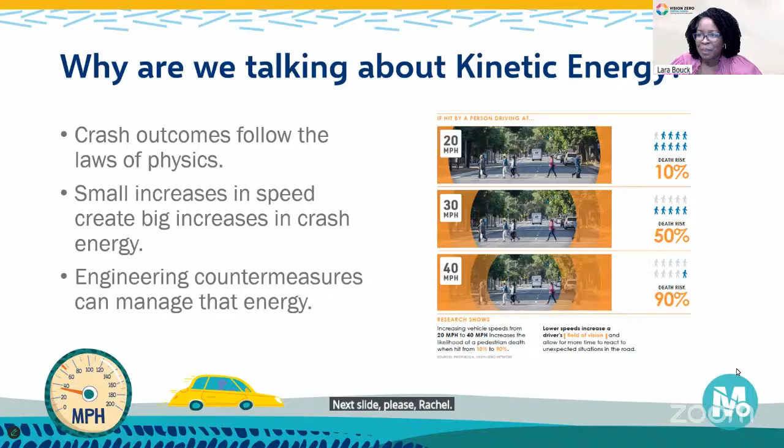So our panel today is going to walk us through the science behind kinetic energy, what it is, how it scales, and why small changes in speed can mean the difference between a minor injury and a life-altering one. Then we'll turn to the engineering perspective, how we can use our design tools from traffic calming to protective infrastructure to control energy in the real world. And finally, we'll look at a case study that brings these ideas together, showing how applying these principles can transform safety outcomes in our community.

By the end of this session, we're hoping that you'll see kinetic energy not as an abstract physics concept, but as a practical lens for understanding and preventing serious and fatal traffic crashes. It's a way of thinking that helps us design systems where human mistakes don't have to lead to tragedy.

So to guide us through this conversation today, we are joined by Dr. Wes Kumfer, a senior engineering research associate at the UNC Highway Safety Research Center. His work includes crash data analysis, the safe systems approach, and workforce development, and he has led a wide range of safety research projects for both FHWA and NHTSA. Dr. Kumfer is also a key instructor for the Road Safety Academy and the Traffic Engineering Accident Analysis System.

We're also very pleased to welcome Luana Brashears, a professional engineer with 15 years of experience across the public, private, and academic sectors. Luana currently serves as ITE's Planning and Safety Senior Director, where she leads research, technical initiatives, and project management in support of federal and international transportation safety efforts. Her background includes extensive work in safety operations, multimodal planning, and development review.

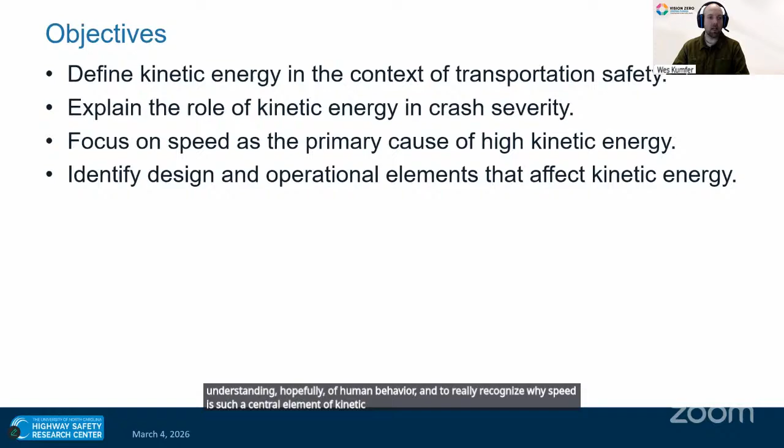I'm also going to give you a little bit of psychology and a better understanding of human behavior, to really recognize why speed is such a central element of kinetic energy and why it can be difficult to address. So in that vein, I want to start out with a little thought experiment.

I would welcome you to put responses to this into the chat pod. I want you to think of a roadway near you, and answer three questions in relation to that roadway. You can pick any roadway near you. Think about what the speed limit is, and whether that roadway intuitively leads drivers to that speed limit, and why or why not. I'll give you a minute or two to think about this and see some answers pop up in the chat pod, and then I'll move on to an example that is very close to my house.

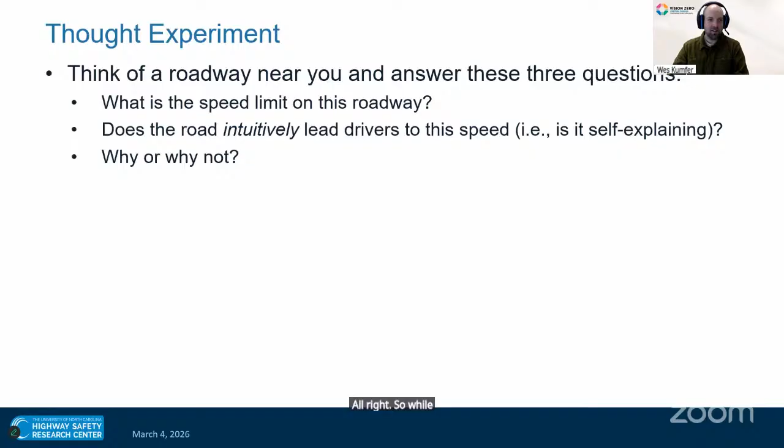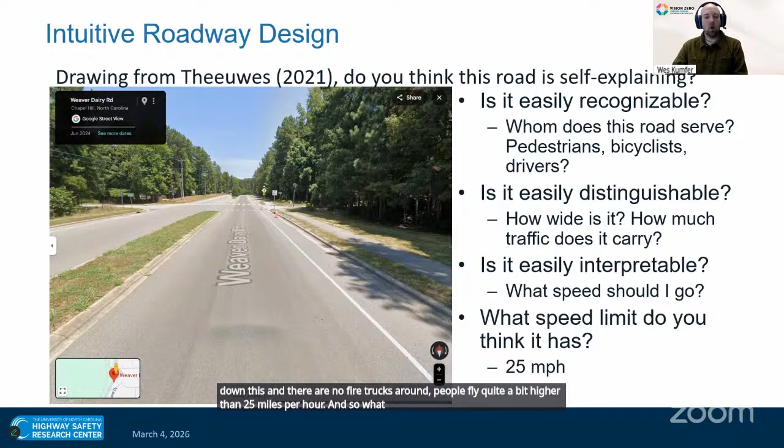One of the central themes I'm hoping to draw out is that we really need to try to manage speed by designing intuitive roadways so that we can address kinetic energy. All these concepts are related. Our inability to prevent death and serious injuries on roadways is in many ways related to the way that we design roadways and expect drivers to interact with them. It makes it important for us to consider how we are designing intuitive use of a roadway.

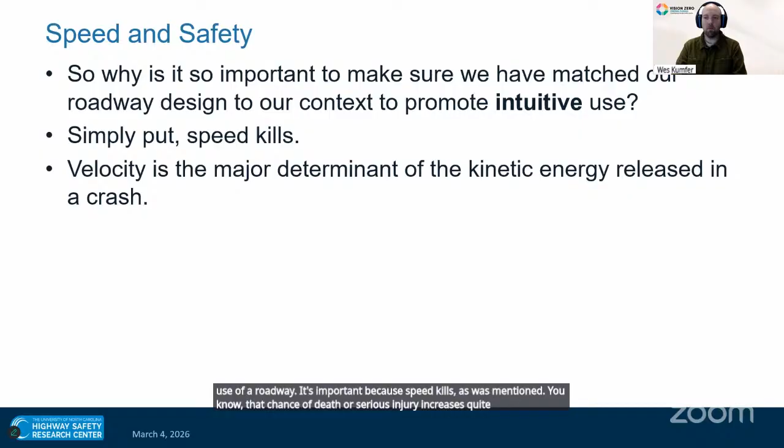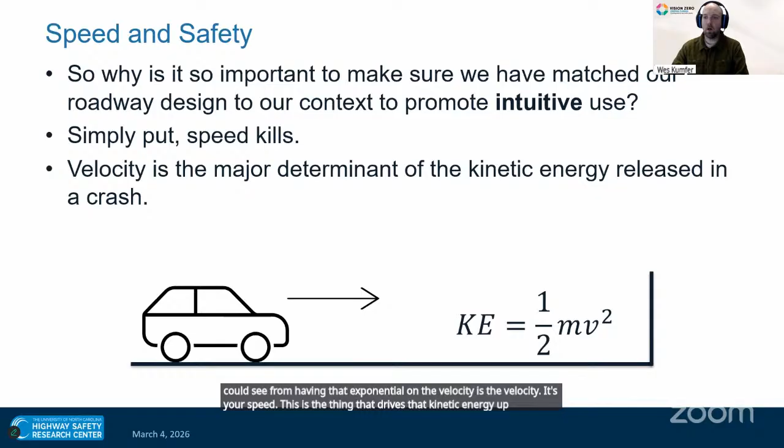It's important because speed kills. As was mentioned, the chance of death or serious injury increases quite a bit as your speed increases, and it really just comes down to physics. Kinetic energy is 1/2 times your mass times your velocity squared. So the most important factor, as you could see from that exponential on the velocity, is the velocity — your speed. This is what drives that kinetic energy up, and it is what makes it so hard to prevent death and serious injury on our roadways.

I see one comment that my example assumes no speed limits. Yeah, definitely not very good signage either. There are some speed limit signs, but at least on that stretch I showed you, there weren't.

So I'm going to present some statistics now to illustrate the reality of why this is so important and what it is, or what I mean, when I say that speed kills.

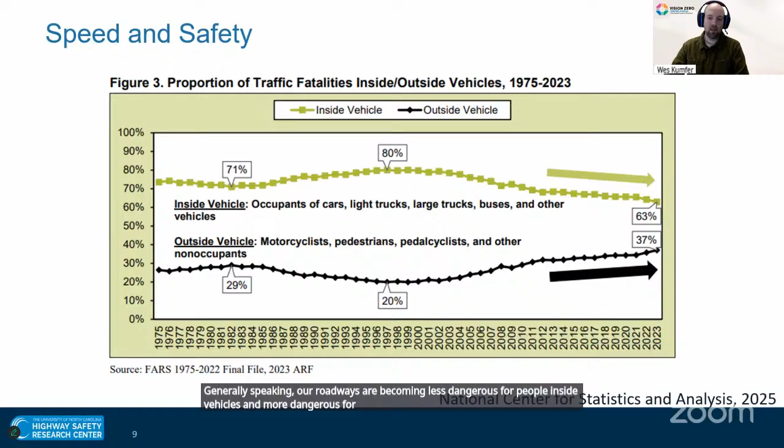However, we've seen an opposite trend where for people outside vehicles — pedestrians, bicyclists, motorcyclists as well — that fatality trend has been consistently going upward. There have been some slight changes here and there, especially with pedestrian safety, but generally speaking, our roadways are becoming less dangerous for people inside vehicles and more dangerous for people outside vehicles. That matters when we think about who is protected and shielded from kinetic energy.

But when we look at what affects kinetic energy and how it can impact different people involved in crashes — I mentioned earlier that the fatality trend for vehicle occupants has been going down over time, and part of that is the fact that we have much safer vehicles, generally speaking. You can now survive a collision within a vehicle that has better crumple zones, better seat belts, better airbags. And we do have a better sense of how kinetic energy is transferred between vehicles when a crash occurs.

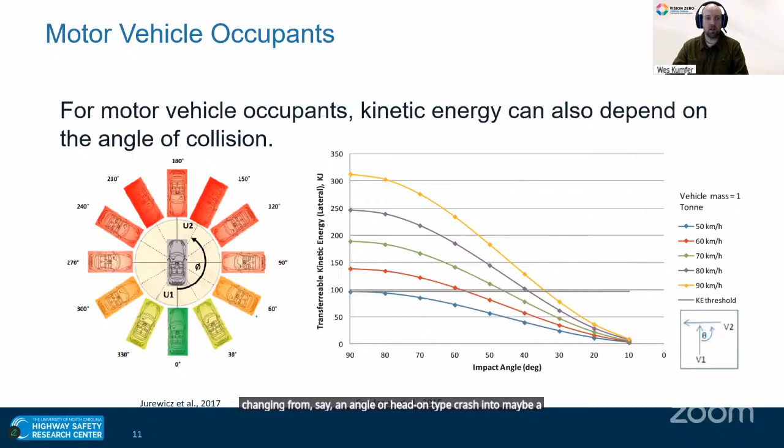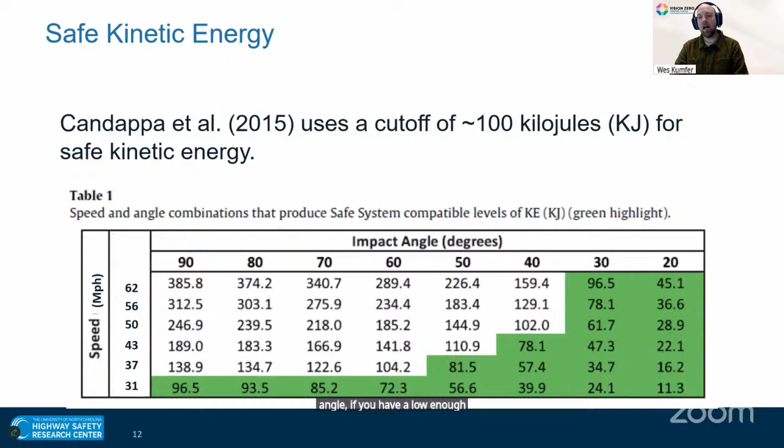However, when we consider the differences between who is involved in those fatal crashes — people outside the vehicle versus inside the vehicle — we see that even these safe spots, where you can survive a crash at pretty much any angle if you have a low enough speed, do not necessarily apply to people outside of vehicles. There's been a fair bit of research showing that this follows something of a power curve.

Most statistics say 18 miles per hour is where you get about a 10% chance of fatality or serious injury. 20 miles per hour would be how you'd standardize that with designs, but 18 miles per hour is about where that 10% fatality injury risk sits. As you increase your speeds, you increase your chance of death or serious injury quite a bit.

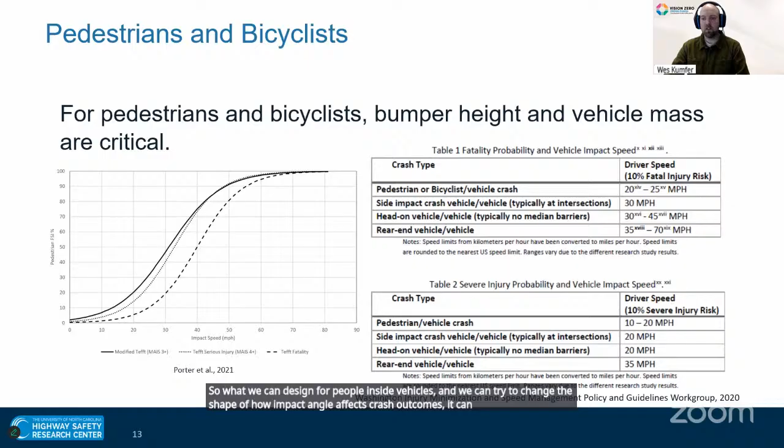So while we can design for people inside vehicles and try to change the shape of how impact angle affects crash outcomes, it can be hard to do with pedestrians and bicyclists, and it remains something of a pernicious problem within traffic safety. Another thing worth considering when designing our roadways and thinking about who uses them and whether they're intuitive for different road users is the fact that our motor vehicles have gotten quite a bit larger in the United States over time.

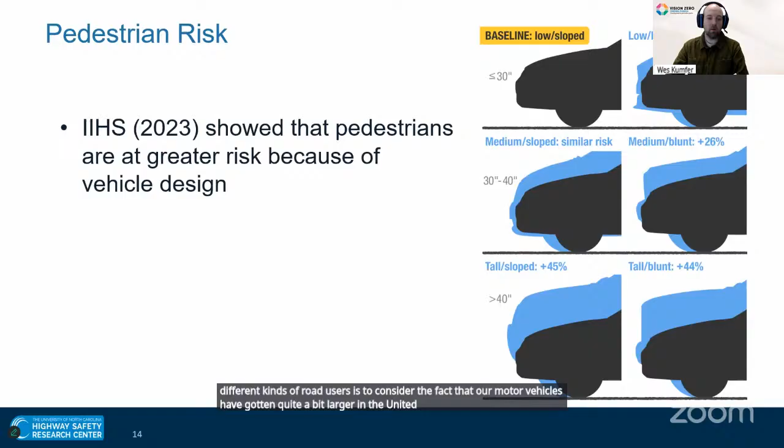Research done by IIHS showed that pedestrians are at greater risk because of vehicle design. Over the past 30 years, our giant SUVs are now 4 inches wider, 10 inches longer, 8 inches taller, and about 1,000 pounds heavier than they used to be. So while that V squared is the most important part of that kinetic energy equation, when your M value goes up, we know it can change those severity outcomes as well.

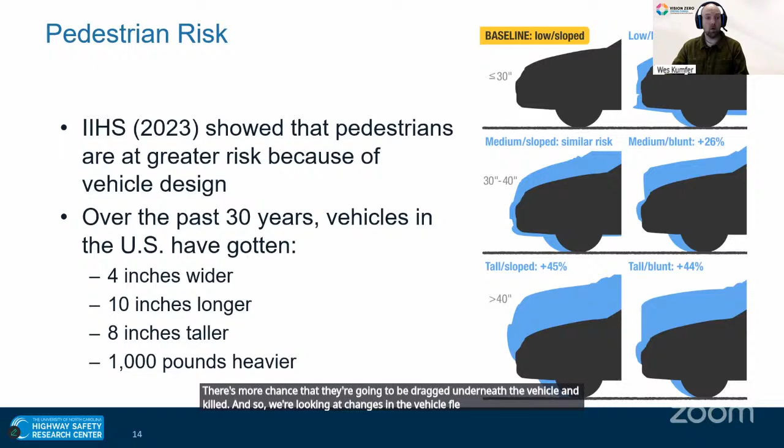The reason bumper height is important is because it changes the way injuries affect pedestrians and bicyclists. In the past, if someone was struck by a car, maybe they would roll up onto the hood and there would be a greater chance of survival. However, if you have a large SUV striking someone square in the chest, there's more chance they're going to be dragged underneath the vehicle and killed. So we're looking at changes in the vehicle fleet and greater risk to pedestrians and bicyclists over time.

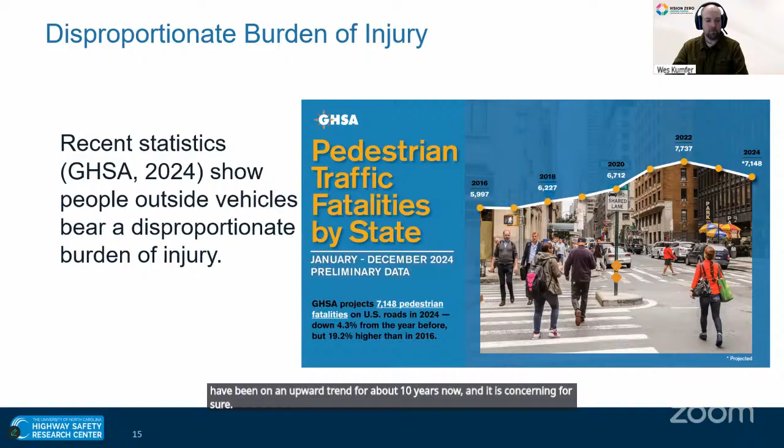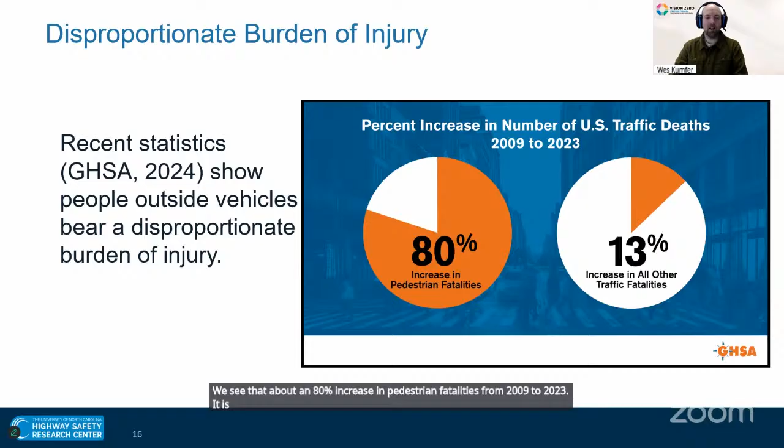You can see this in the statistics, as I mentioned, with pedestrians—there is just a disproportionate burden of injury. As I mentioned, that pedestrian fatality trend did change a little bit within the last couple of years. We've seen a little bit of improvement, but generally speaking we've been on an upward trend for about 10 years now, and it is concerning for sure. We see about an 80% increase in pedestrian fatalities from 2009 to 2023. Who is being killed on our roadways is disproportionate.

It's also worth considering, when we're talking about speed management and why it's so important, some of the other human factors involved as well. We know that stopping sight distance increases the faster you're going, meaning it's much harder to react. But we also know, just from a human factors perspective, that people's vision somewhat narrows and becomes tunneled as they go faster, making it much harder to react to, say, those pedestrians or bicyclists crossing in front of you.

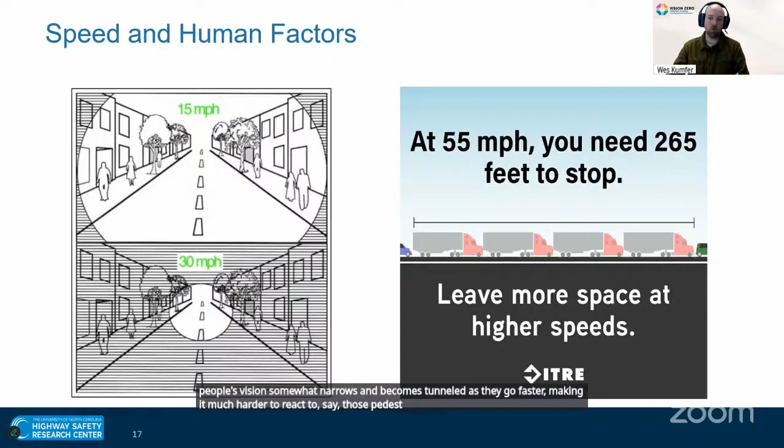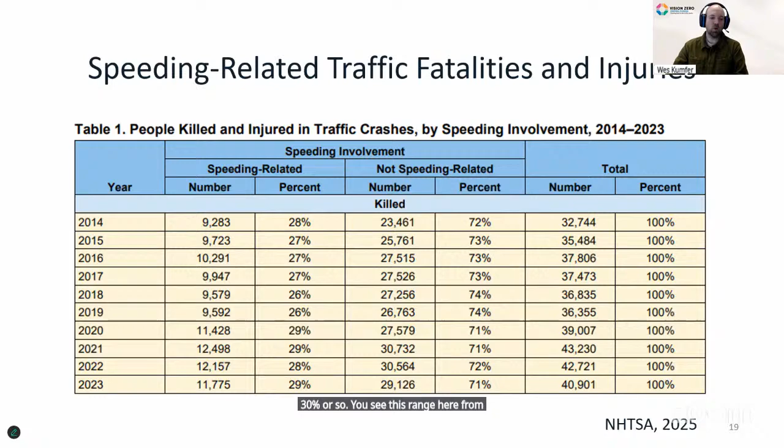I do always like to add this caveat of whether we should be concerned about speed or speeding. While most of the NHTSA-related statistics you're going to see are related to speeding—because saying 'speed' in a crash data form is much harder to measure—we do know that speeding involvement for crashes hovers at about 30% or so. You see this range here from 26% to 29%. Generally speaking, in the US, it has hovered at about 30% per year, and that has been consistent for a very long time.

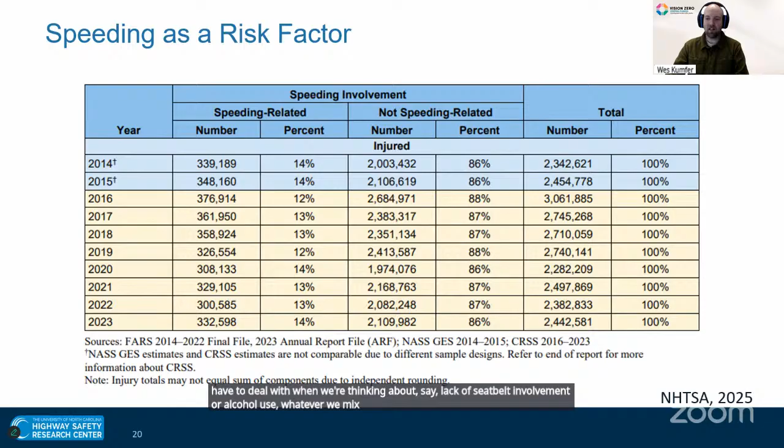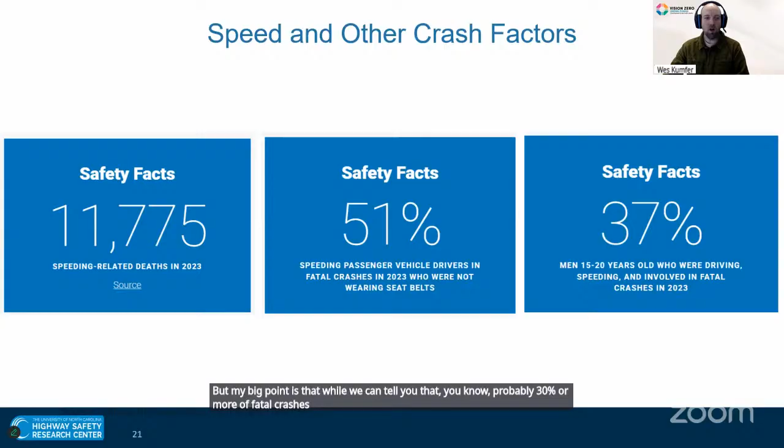Speeding involvement tends to confound some of these other issues we have to deal with, like lack of seatbelt use or alcohol involvement. Whatever we mix speeding as a risk factor in, it can become more dangerous. Speeding is one of the things we often focus on because it's what we have in our crash forms, it's what we know how to address, and it's what our speed limits are designed for, helping us with enforcement. But my big point is that while probably 30% or more of fatal crashes involve speeding, we also know that in many ways we design our roadways to convey unsafe speeds.

We also know that demographics change, and as people are younger or older, they become more susceptible to kinetic energy as well. All of this will lead me to give you a brief taste of how we manage kinetic energy before I pass it off to Luana. We need to consider how roads intuitively guide drivers to an appropriate speed, as I mentioned at the very beginning when we were talking about that 25-mile-per-hour roadway near me.

That was not an intuitively designed road. It probably wasn't designed to lead people to drive 25 miles per hour. When you have road users of very different mass—SUVs, pedestrians, bicyclists—coming into conflict, then you're going to have unsafe outcomes.

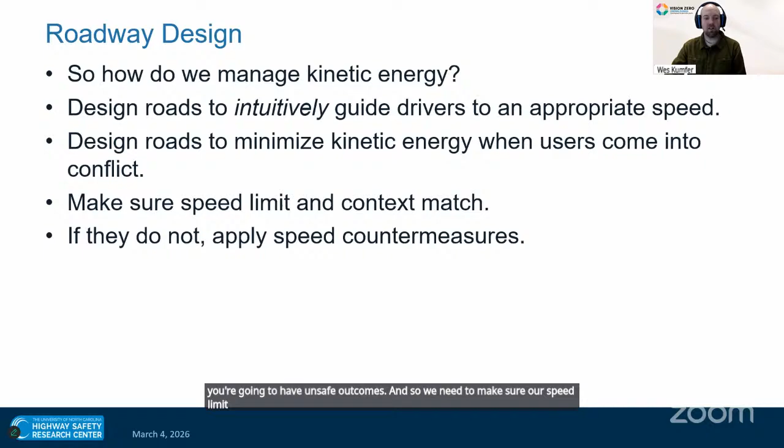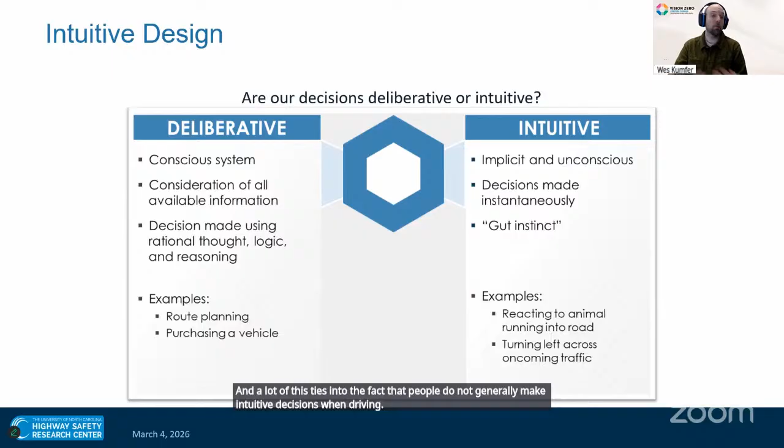So we need to make sure our speed limit and our context match, and if that doesn't work, we need to apply some countermeasures. A lot of this ties into the fact that people do not generally make deliberative decisions when driving. They tend to just follow their gut instincts.

And we know those gut instincts for how we drive are driven by the information we receive around us, driven by the environment. So we can try to change people's behavior by providing information, or we can try to change that environment and guide people without having to deliberately get them to make that decision. That's again why things like roundabouts are so important.

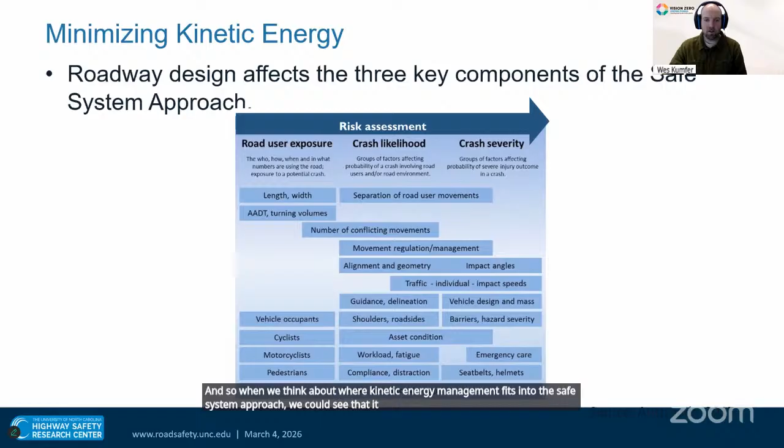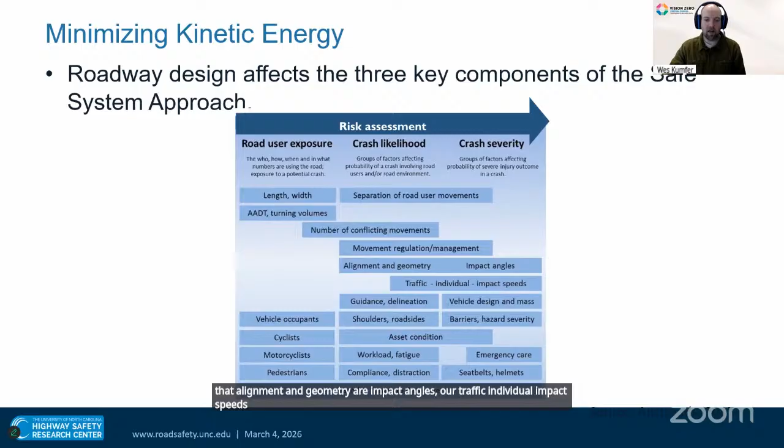When we think about where kinetic energy management fits into the safe system approach, we see that speed affects both your crash likelihood and your crash severity. So there's quite a bit to take into account when designing our roadways within a safe system approach—alignment and geometry, impact angles, individual impact speeds, vehicle design and mass. All of these things are worth considering from a safety perspective.

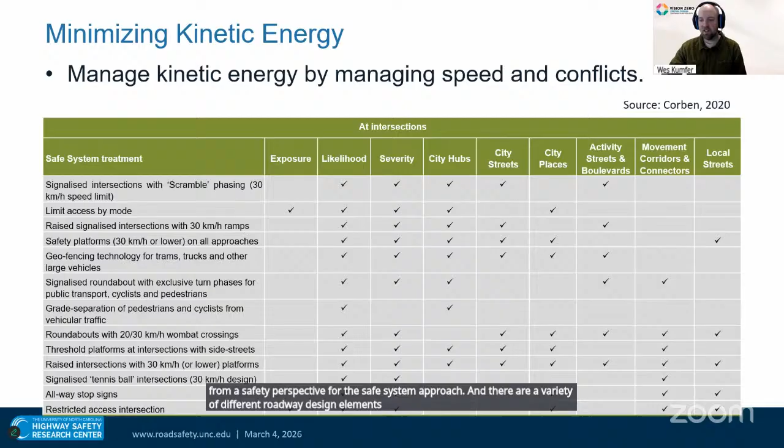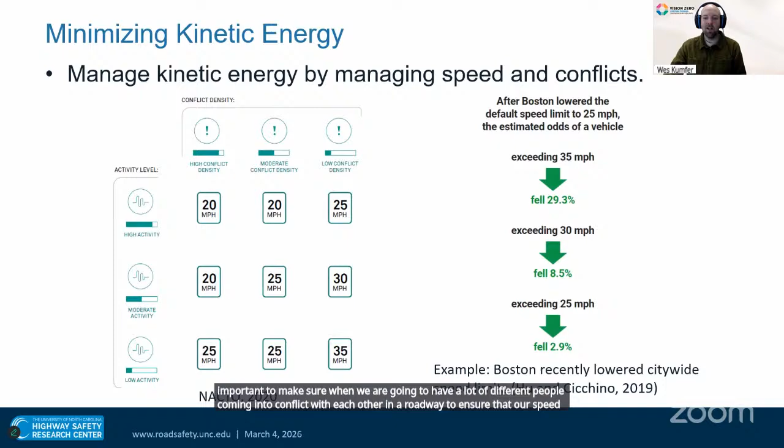There are a variety of different roadway design elements that could fit into these. In the interest of time, I'm not going to cover this too much—I'll let Luana share more from her perspective. But we do know it's critically important, when we have different people coming into conflict on a roadway, to ensure our speed limits are low, and we often find great benefit from reducing those speed limits.

One way we can also reduce those intuitive speeds is to improve visual friction—roadway elements that mentally restrict people as they're driving, like street trees, trash cans, flex posts, narrow lanes. These can all cause people to slow down. We could also rely on vertical and horizontal deflection, like speed bumps and curves.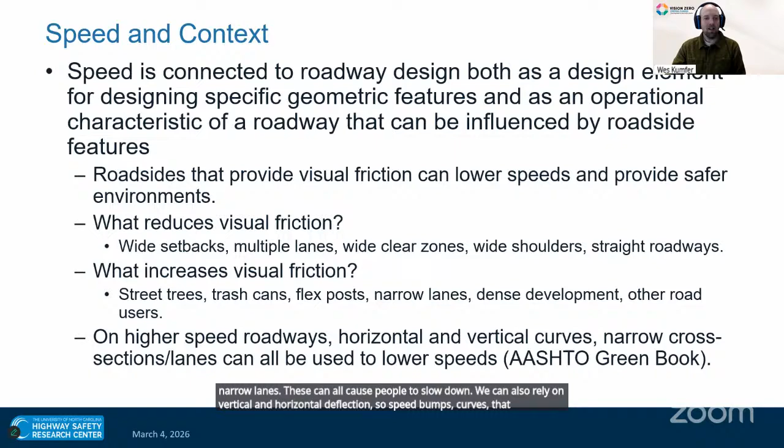We can also think about where within our roadway system we are—rural, urban, or suburban roads—there are a variety of techniques that can be used to slow people down. I really like how the FDOT design manual addresses this by providing a whole menu of options: if you're in an urban center, you should be targeting speeds as an engineer or planner from 25 to 35 miles per hour.

And to get there, here are the things you need on your roadways if you don't initially design for that target speed—things like street trees, short blocks, speed feedback signs, and so forth.

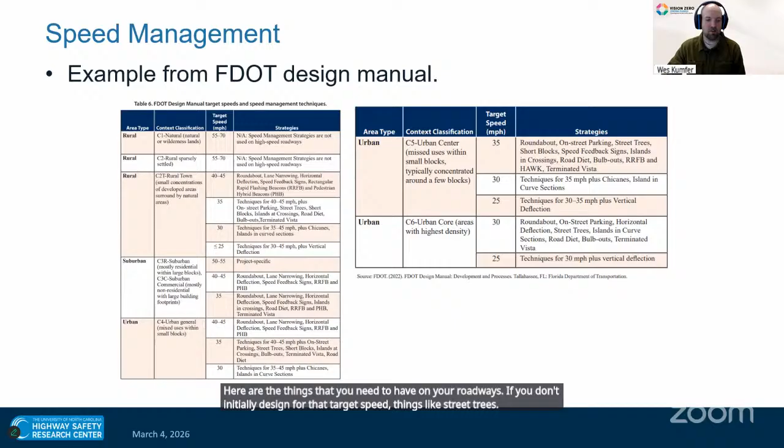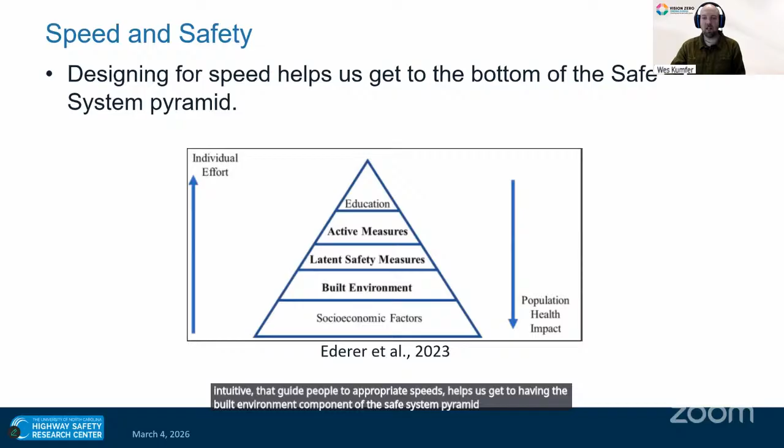Addressing all of this, making sure our roadways are intuitive and guide people to appropriate speeds, helps us get to the built environment component of the safe system pyramid, where we're improving safety for all road users. So in conclusion, kinetic energy does kill.

Speed is the critical element of kinetic energy, and vehicle size does matter. We want to make sure we're keeping those speeds down, especially when different kinds of road users come into conflict. We can design our roadways to be more intuitive, but we can also install speed countermeasures when they aren't—this is all a critical element of the safe system approach.

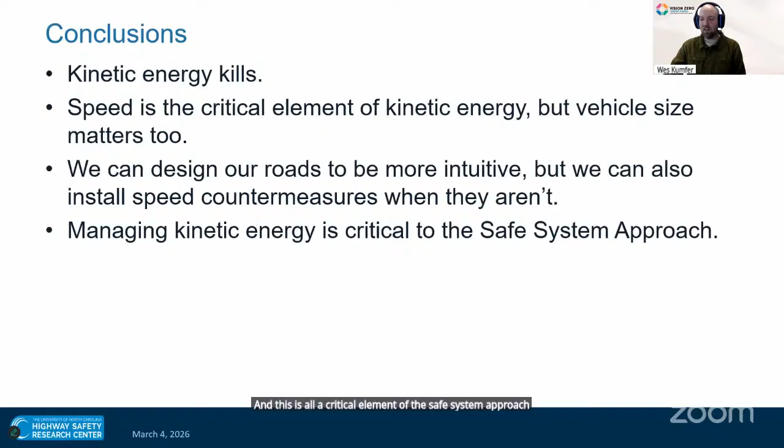Now, what I'm talking about is exactly what Wes just mentioned—how can we think about kinetic energy through the safe system lens? So what I'll do here today is give a framework, some ideas at a higher level of how to implement those strategies to really try to manage kinetic energy in your systems.

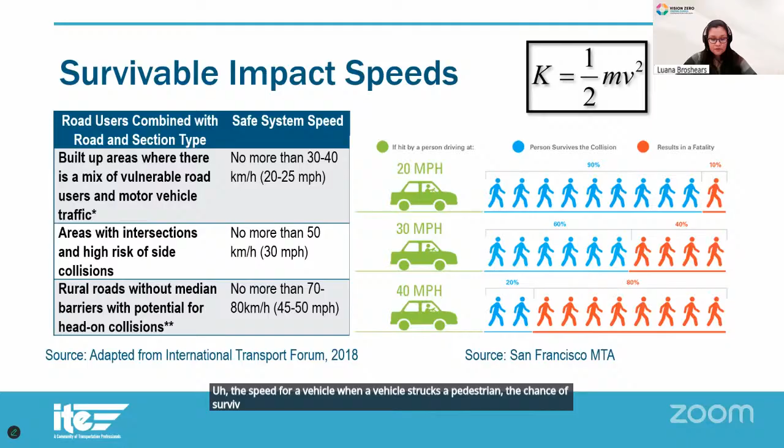Just to give you an idea, when we talk about people outside the car, this graph shows the survivable impact speed for a pedestrian. As you can see, when you increase the speed of a vehicle, when it strikes a pedestrian, the chance of survivability is lower as you increase the speed. Just a few things to keep in mind as we think about these things.

So if we're thinking about kinetic energy, let's talk about the kinetic energy components in our transportation systems - exposure, severity, and likelihood - and how to address those. This is a high-level framework of ideas on how you can start to prioritize strategies to really make a difference and ensure you have no fatalities and serious injuries in your system. Exposure is where and how far people are traveling; severity is speed, mass of the vehicle, and vulnerability in a conflict; and likelihood is where those conflicts occur.

When you think about how to address those, the things I like to group under each component include demand management - how can you decrease reliance on vehicles through supportive land use, again at the base of the pyramid? How can you increase home, employment, and shopping proximity, reduce satellite development, shorten travel distances, and really reduce vehicle miles traveled?

So strategies like these really can help create shorter trips and shift the demand across several modes of transportation. And then for severity, really speed management, as Wes already mentioned before, how can we adjust speed for the context, the land use, self-enforcing roads? And then lastly, likelihood, right?

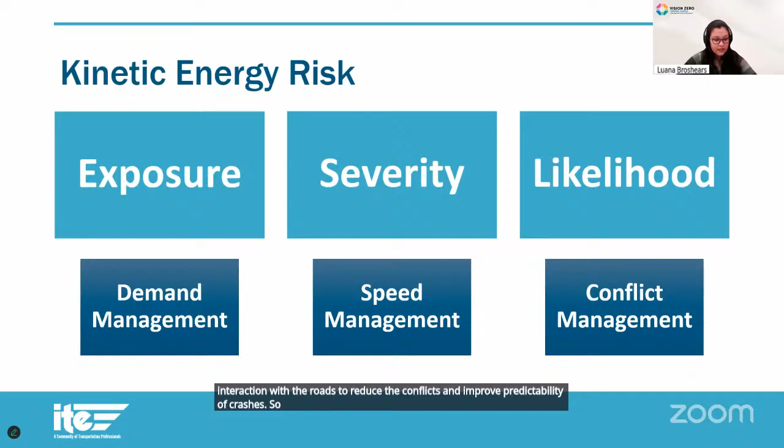So let's talk very quickly about each of those. Demand management, as I mentioned before, is one of the things that as planners and engineers, typically we just focus directly on those built environment strategies. We go straight to how we're going to separate conflicts and reduce speeds. But this first step is sometimes missed when we're thinking about safety.

But demand management really is the first step when we talk about safety strategies. How can you reduce exposure? We already talked about how shifting trips to other modes like transit, when it's reliable and comfortable, and first and last mile accessibility experiences are also strategies. Shortening trips - how can you have better job housing balance, affordable housing close to transit stops, as we mentioned before?

How can you eliminate trips by mixing land uses, really thinking again about VMT mitigation and, of course, supporting the needs of populations facing persistent poverty? So mode shift really is a safety strategy. That's one of the key things that I hope you keep in mind after this presentation.

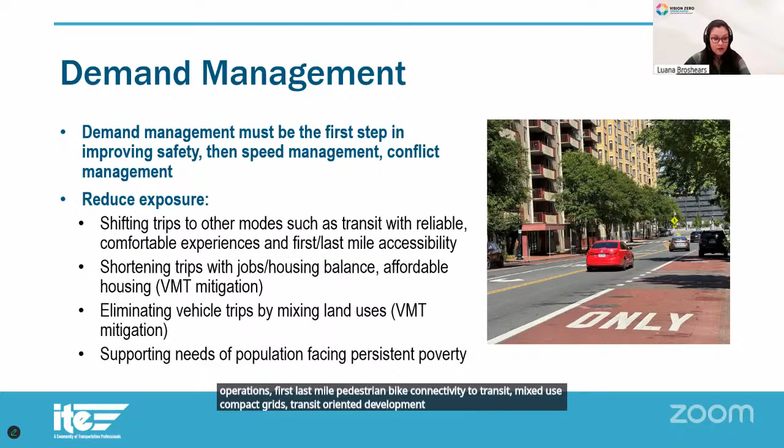When you think, like in this photo, transit only lanes, transit priority operations, first last mile pedestrian bike connectivity to transit, mixed use compact grids, transit oriented development - all of those really are safety strategies. So this is just how to get started to think about all those things.

And if we're talking about demand management, shortening trips, shifting modes, we start to think about how our roads function. And then that's the functional classification discussion that we've had for so long. As I mentioned in the beginning, when you think about transportation systems, you think about who is using the road, who are the road users present, what are the potential conflicts, and what level of protection we have for road users.

And that's when you start to think about, okay, people are using this road, they're using this space. A really cool framework that we've been starting to implement from our colleagues in New Zealand and Australia is the movement and place framework. Really try to balance the mobility with the livability of the spaces to guide the design, to guide the speed based on how people use the space. So not only vehicle volumes, but really aligning safety, comfort, and access. So the new way to think about functional classification is also a safety strategy and a way to manage your kinetic energy in the system.

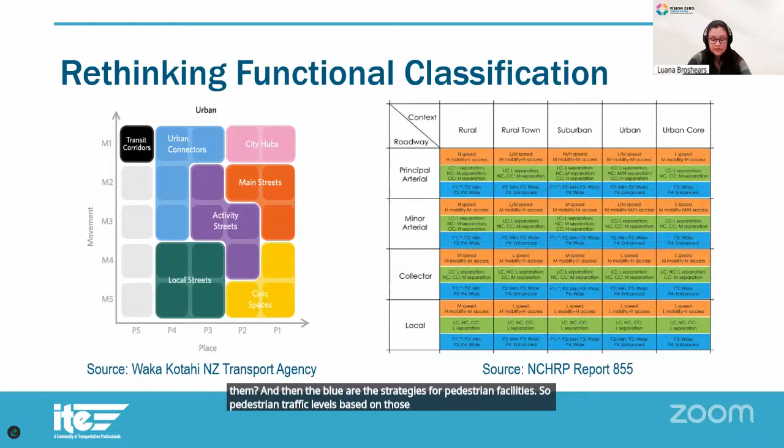So this is NCHRP Report 855, and it just gives you an example of for vehicles, what should be the balance between speed, mobility, and access for each of those contexts, really focused on target speeds. Then the green cells show the bike level of separation - so think about context, how many bikes are using this portion of your road, and what should be the level of separation for them. And then the blue cells are the strategies for pedestrian facilities, based on pedestrian traffic levels, what should be the level of separation for each of those for each context.

So now that we talked a little bit about demand management, we'll go into the framework for a safe system, for your speed management and conflict management portions. Remember, I told you to really focus on this when we're talking about a safe system. We have to anticipate human error and accommodate human injury tolerances through the design of our systems.

These are the strategies we can use, and there are resources for each of these if you want to learn more. To anticipate human error and accommodate human injury tolerances, first you start with speed management: reducing speeds to reduce impact forces, and then in this order, separate users in space, separate users in time, and increase attentiveness and awareness.

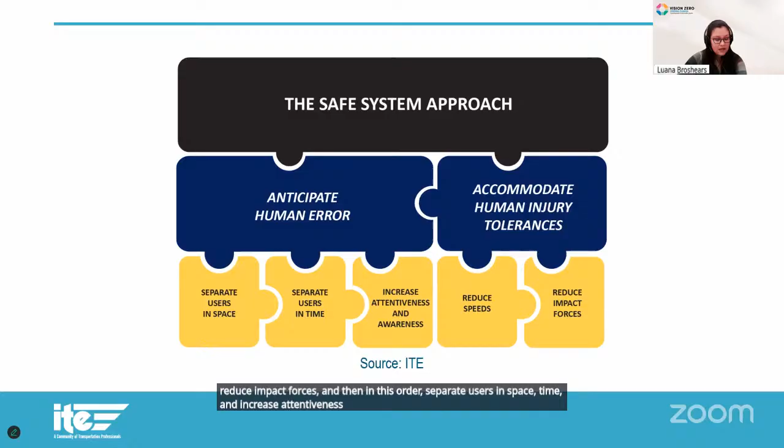Let me show you a few photos of what these look like. These are things you're probably already using as safety strategies, but this is a framework for how you organize your priorities, what comes after the other, the order of importance, and how you have the highest population impact with your strategy.

Speed management—we already talked about how this is a very important factor in kinetic energy. Some examples: context-appropriate speed limits, physical roadway designs, traffic calming, and traffic signal timing that minimizes high speed flow. There's so much new research on that, and it's fascinating how you can time your signals as a speed management strategy.

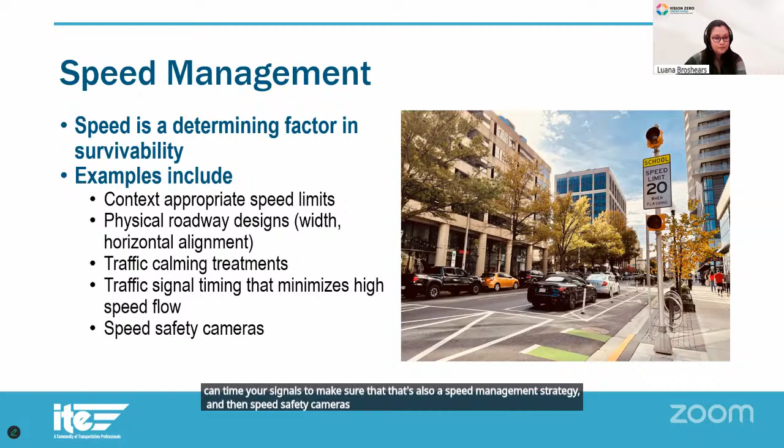Speed safety cameras are another example, and here is a resource that I really like.

Let's talk about separating users in space first. So first you did the speed management part, now you're going to look at your conflict management portion. Separating users in space is very important—how to segregate the physical space to provide dedicated right of way for the different modes that are all in that same space.

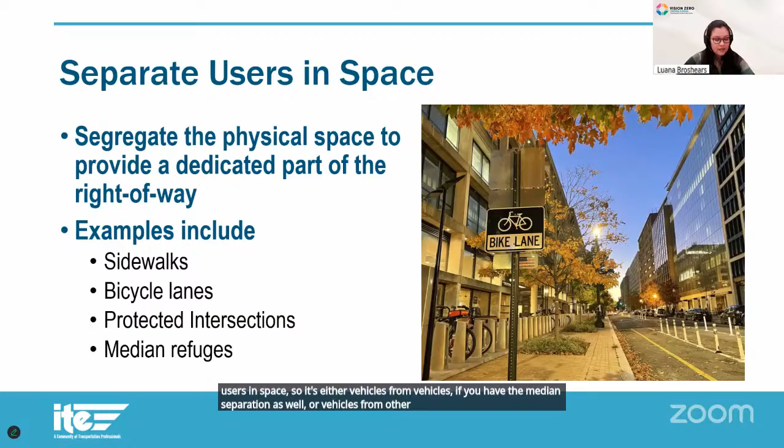This photo is from an urban environment, an urban context. How can you use sidewalks, bike lanes, protected intersections, or median refuges as ways to separate users in space? That's either vehicles from vehicles, if you have median separation, or vehicles from other modes. Those are some strategies you can use.

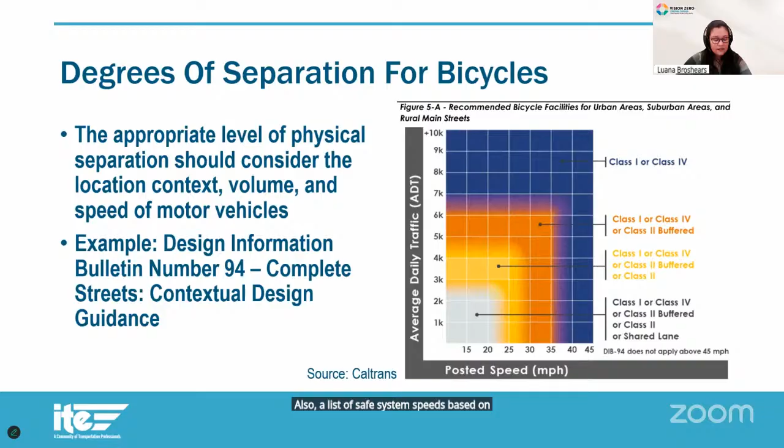This is an example from California of a degree of separation for bicycles—how can you make sure you have the appropriate level of physical separation? Here what they consider is context, volume, and speed of motor vehicles. This entire Complete Streets Contextual Design Guidance is very interesting; if you have a chance to review that resource, they also have a list of safe system speeds based on context and road design. It's a very interesting resource.

Lastly here, separating users in time—strategies to separate users in time. Again, separation in space is very important; that's how you really make sure severe crashes are eliminated and fatalities are eliminated or reduced. But then if they have to occupy the same space, what are some strategies to separate them in time?

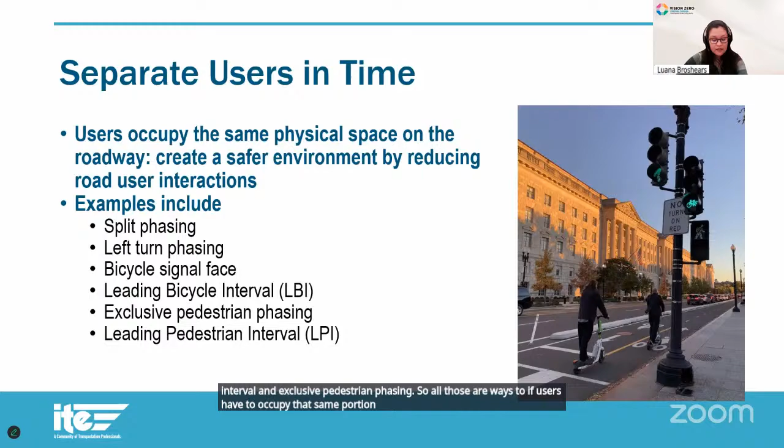Some of the things you're already using as well, I'm sure: split phasing, left turn phasing, bicycle signal face, leading bicycle interval, leading pedestrian interval, and exclusive pedestrian phasing. All those are ways to separate users in time if they have to occupy that same portion of the road. In the last order of priority, here are some examples to look at.

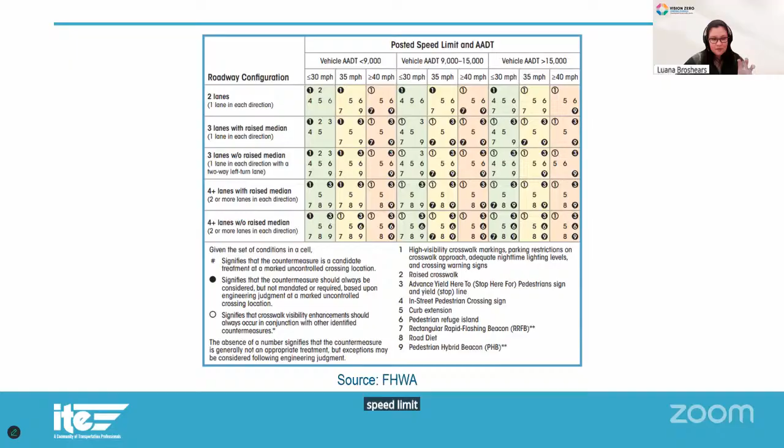This is another resource that I really like from FHWA, for mid-block crossing treatments for pedestrians, based on speed limit and AADT. So there are some examples of what should be the appropriate pedestrian crossing treatment based on those factors.

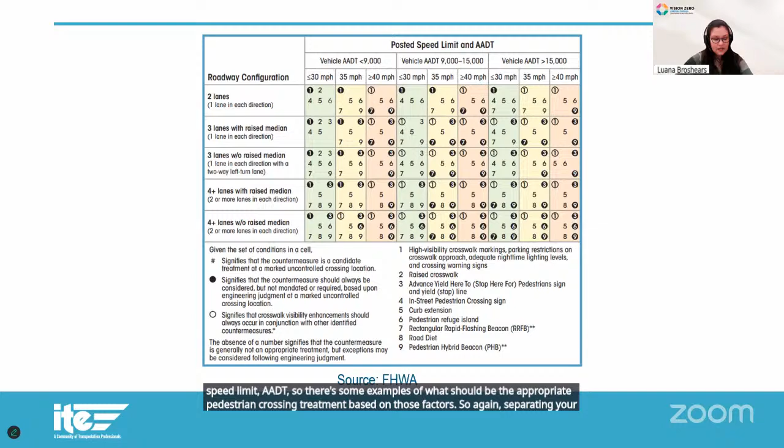So again, separating your users in space. But then lastly, what I want to talk about, going up on the pyramid, is less population impact but very important for reinforcing the redundancy we talked about—how can you increase attentiveness and awareness?

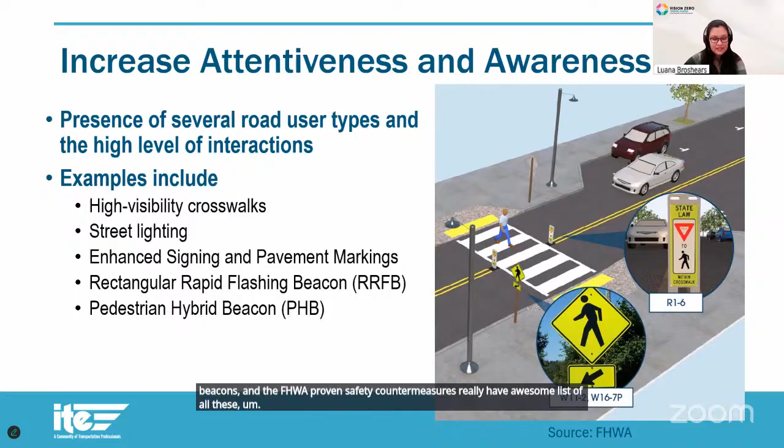So a lot of those strategies you're already using. There are so many resources for you to learn more about each of those types of strategies.

But when you think about prioritizing from the kinetic energy risk and the components priority, and really try to eliminate fatalities and serious injuries, which is the goal here for our road safety, try to start from the bottom of the pyramid and then go all the way up with all the strategies that can provide redundancy and help reduce your fatalities and serious injuries.

The Safety Council is also working on how to measure kinetic energy and evaluate those road safety risks, again making the connection with the kinetic energy aspects we mentioned today. And we have a people-centered mobility great idea group that talks specifically about a lot of those topics, and one of them explores movement in place as well, working together with the functional classification group.

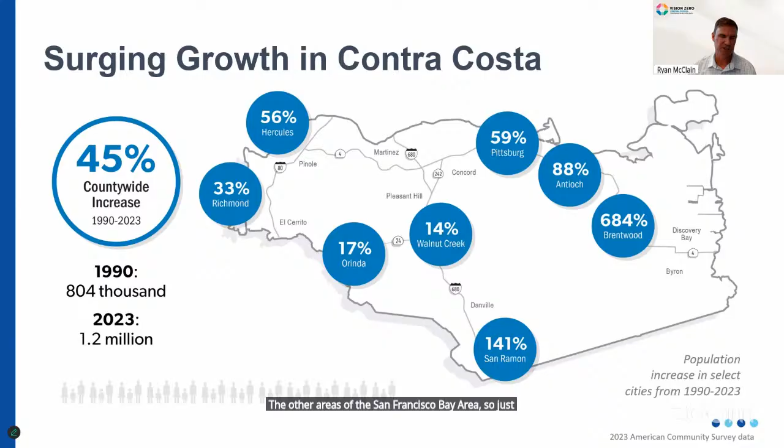What that has led to is, in 1988, a voter-approved half-cent sales tax that went to transportation to solve some of the issues people were starting to see as we saw all that growth. So CCTA, the Contra Costa Transportation Authority, was formed to oversee those expenditures. We build projects, we run programs, we pay for local streets and roads, we fund transit, but we do not own the roads, we do not directly set land use, and we do not operate the transit. So that has presented some challenges on what we can do, but we really wanted to see what we could do with what we have to start to influence the safety outcomes we're seeing.

One of the other benefits we see with our half-cent sales tax is that we actually get a return on that investment. For about every dollar we collect in taxes, we get about $3 in grant funding from various sources at the regional, state, and federal level. So it gives us a lot to work with from a financial standpoint.

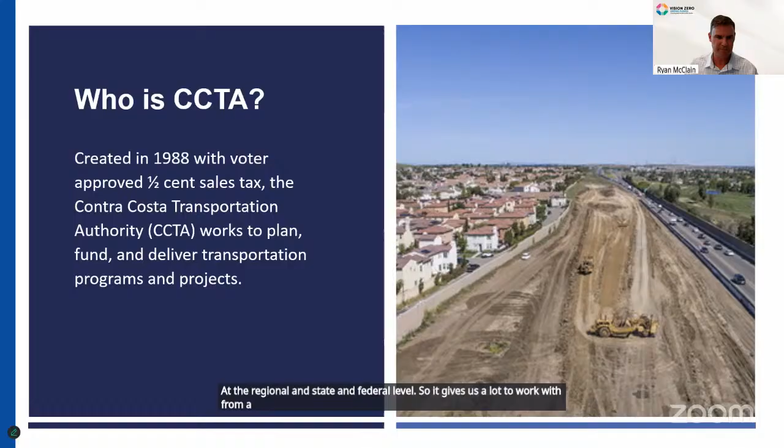Over the last couple years, we have undertaken a new countywide transportation plan, which we do every 5 or so years. This really helps set a vision for where we want to take transportation and where we want to spend that half-cent sales tax.

This new plan is really a different approach than we've taken in the past. We've funded a lot of freeway projects, a fair amount of transit projects, but most of the local streets and roads work has been giving that money over to local governments and having them build the projects they want.

Which often means repaving. So this time, we really see a need, and we're hearing this from the public, to start doing more local streets and roads projects that help achieve the outcomes we want from a safety standpoint.

We've done quite a bit of outreach around this and looked extensively at the needs in the area, and obviously one of the key areas for us was safety. We saw a lot of unmet needs. We have a Vision Zero plan and a safety action plan, but we haven't really put those into practice enough to actually start moving the needle on severe and fatal injuries.

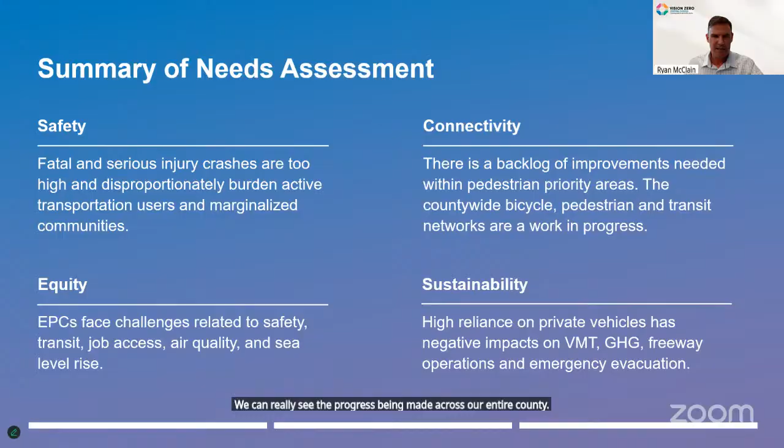Safe travel: traveling in my community is safe and comfortable no matter how I get around. Livable and connected neighborhoods: conveniently and comfortably get to places that are important to me without having to drive. Growing sustainably: confident that transportation investments in Contra Costa will help provide a sustainable future for my community. And access for all: I can shape and enjoy transportation projects that improve my community no matter where I live. These were really our guiding principles for the development of the CTP.

And again, the way these interact, they really can benefit each other. We can achieve all of these goals through similar measures.

This led to a movement and place framing, as Luana set up nicely for me to talk about, really thinking about how people get around, but also about these roads we've built in a lot of places that were reactive to land use and mostly the need of drivers to drive down these roads. How can we actually start thinking more about how to set these places up to achieve the safety outcomes we're looking for?

The network in the suburbs after World War II was really driven by thinking about the automobile and how to maximize automobile throughput. So this is a big shift, as I mentioned. CCTA would shift into more place-oriented streets instead of just reacting to land use decisions made at the city or county level, actually influencing those decisions and making sure the transportation system is coordinated with them.

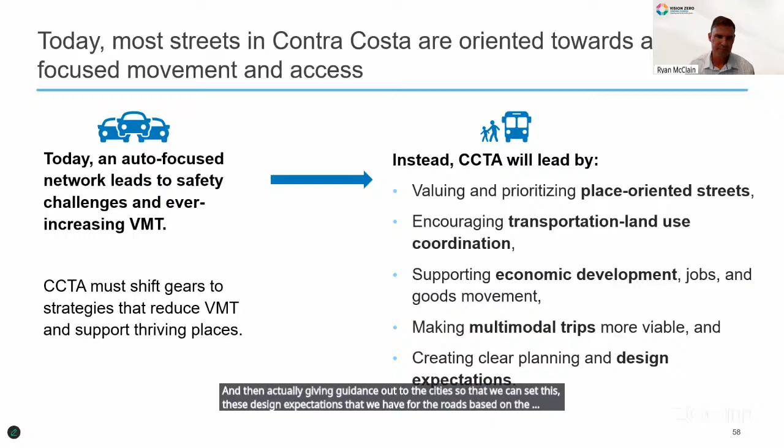This starts to really look at classification and how we define these streets, thinking about that differently, especially around the land use piece, thinking about how we move people as opposed to just cars, and really how that all ties to the quality of life that our residents are looking for.

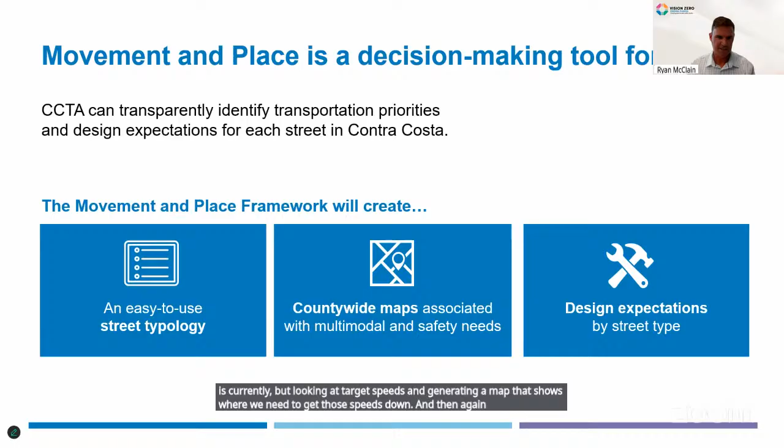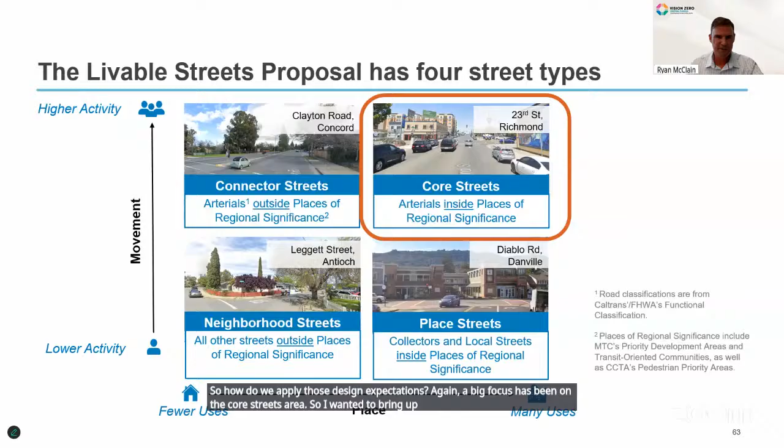So how do we apply those design expectations? A big focus has been on the core streets area, so I wanted to bring up one example. One thing that happened out in East County was, as we were building and expanding the freeways, some of the highways left over remained these large roadways, but happened to go right through the middle of a core area, and were never really redesigned to be appropriate for that type of place. Identifying that context and rethinking it, not just accepting what's out there, is a key first step.

And then setting target speeds, looking at transit performance, looking at customer experience, and really getting toward the desired street use experience—is this street doing what we want the street to do? And then applying the appropriate tools. A lot of those tools are what Luana just talked about.

This is really setting up a hierarchical approach, prioritizing demand management—if people don't have to drive, that reduces exposure. Speed management, getting the speed we want to reduce the chance of an injury crash. And then conflict management, how do we actually separate users in space and time.

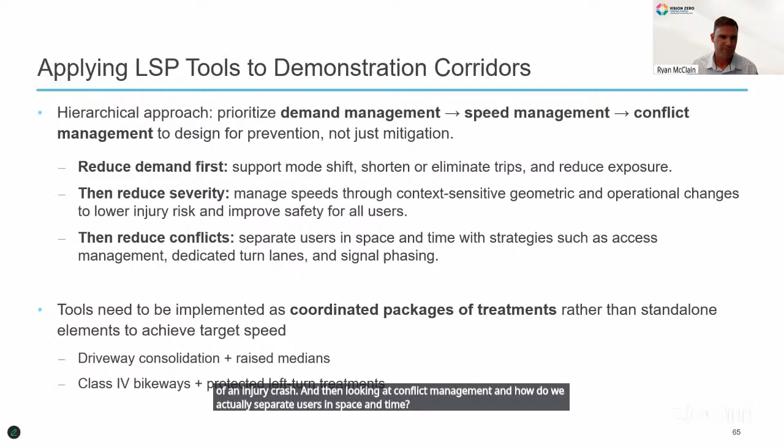So this is the road in Antioch. You can see it's even wider than Wes's example, I think—it's a huge road, used to be the highway through here. There's single-family residential, a lot of commercial, a church on one side, and a lot of desire for people to cross the street with very limited opportunity to walk or bike across. This is an example where we're never going to get to 25 miles per hour without some pretty substantial interventions, but 25 miles per hour, given the use context, is what we want the target speed to be.

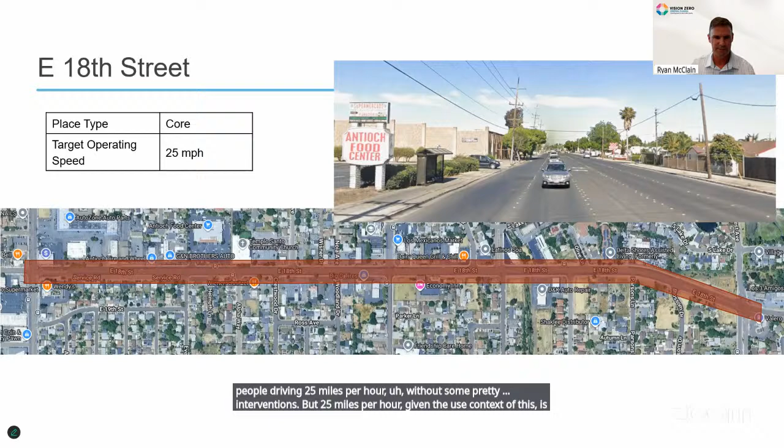This type of configuration probably looks pretty familiar. How do we reuse that space to reach the outcomes we want? This means vertical elements, narrowing those lanes, providing safe travel for other modes so people can make that choice. It goes beyond just the typical road diet of restriping, but actually puts vertical elements and other key features in there.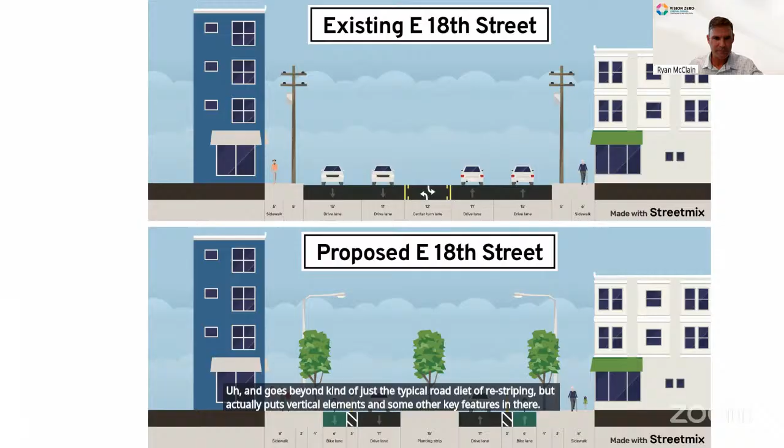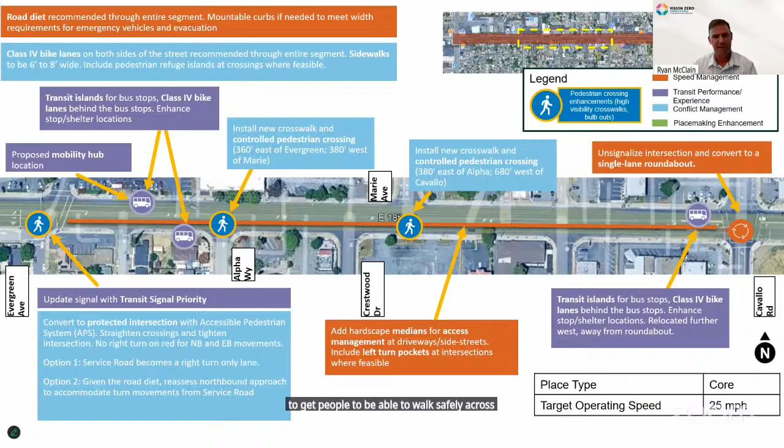This outlines—I'm not going to go through all of it—but it sort of outlines all the interventions, really thinking about getting people to walk safely across the street, having frequent and safe crossings, improving transit. We see transit as a key way to reduce exposure by getting people out of vehicles. The way we can influence transit is by building transit islands and encouraging our transit operators to operate higher frequency buses along here. It's really a comprehensive package on redefining the street to better match the actual place it's in.

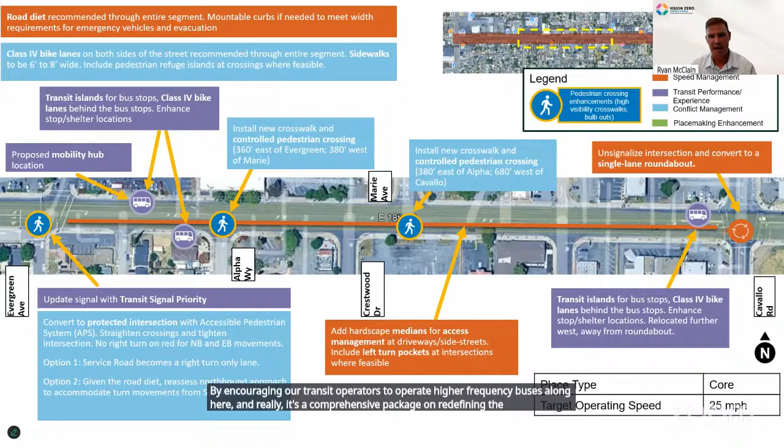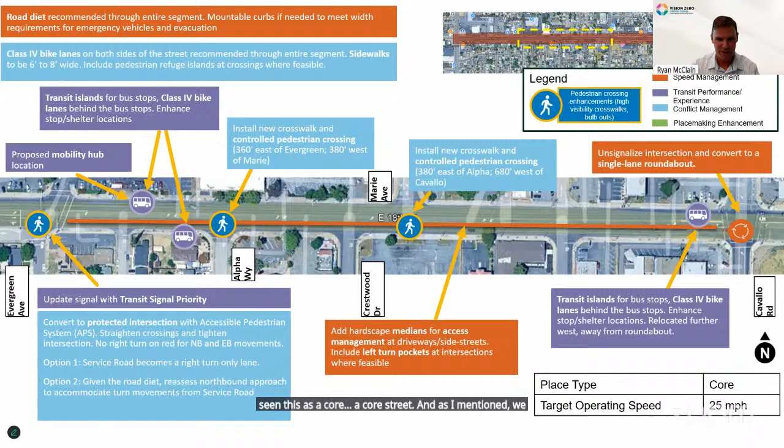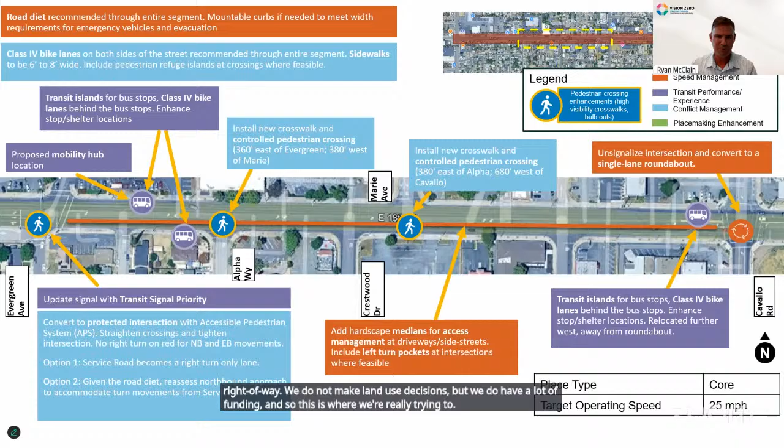So again, seeing this as a core street. As I mentioned, we do not own right of way, we do not make land use decisions, but we do have a lot of funding. So we're really trying to come up with a toolbox and then provide a carrot for that toolbox by tying funding to these types of improvements. That's how we're trying to address this across the county, but thinking at the local level.

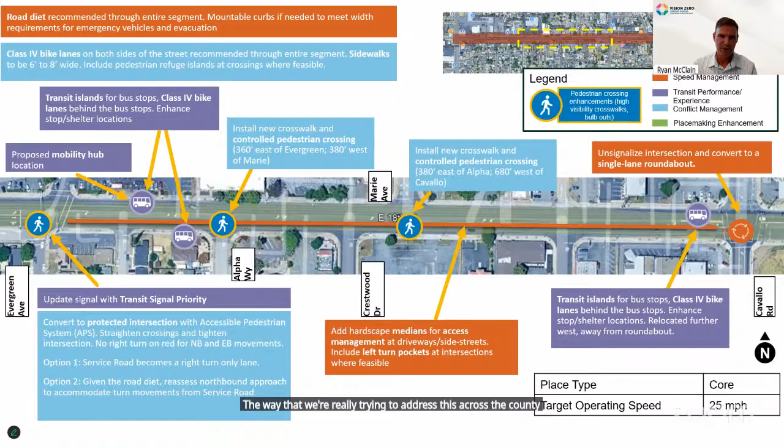And that is the end of my presentation. I think I will turn it back to Laura and we'll get into Q&A.